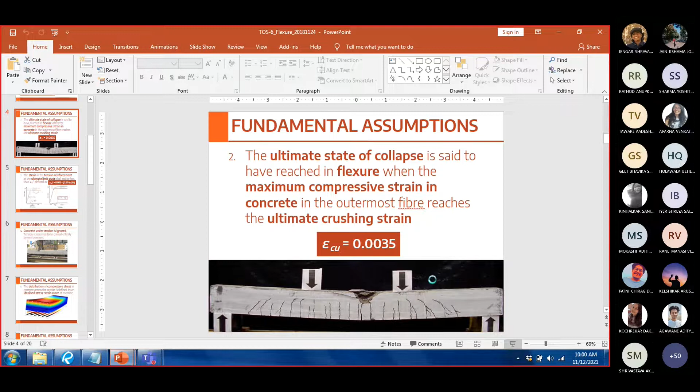Okay, so this is where we stop.

Concrete under tension is ignored because it is assumed that the tension is carried entirely by reinforcement, since the tensile strength of concrete is much lesser than its compressive strength. Also, the extent of cracking is not certain. In some locations, cracking might be up to a certain depth, in other locations up to a different depth, so we don't know how much concrete is already cracked. Therefore, we simply consider concrete only above the neutral axis. Whatever is below the neutral axis is just for holding the reinforcement in position, resisting shear and so on, but we do not consider its contribution in flexure.

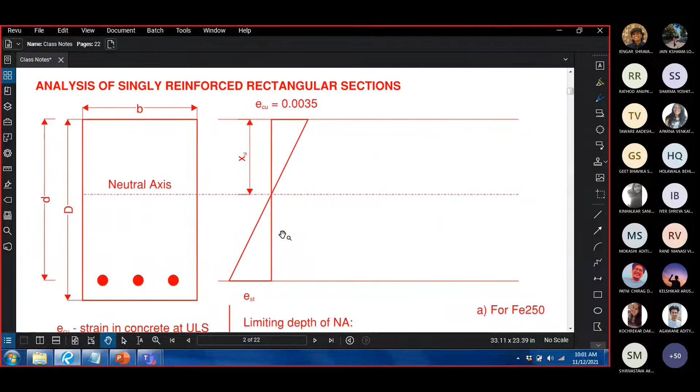The next assumption is that the distribution of compressive stress in concrete across the section is defined by the idealized stress strain curve of concrete. This might seem complicated, but it's easy. If this is my section, I know the strain variation. I'm already aware of the stress strain graph of concrete. So if I correlate this stress strain curve with the strain variation, the stress in concrete would be parabolic up to a certain point and then linear. As the strain increases, the stress increases parabolically up to a certain point, and then it is linear. That is what this assumption says.

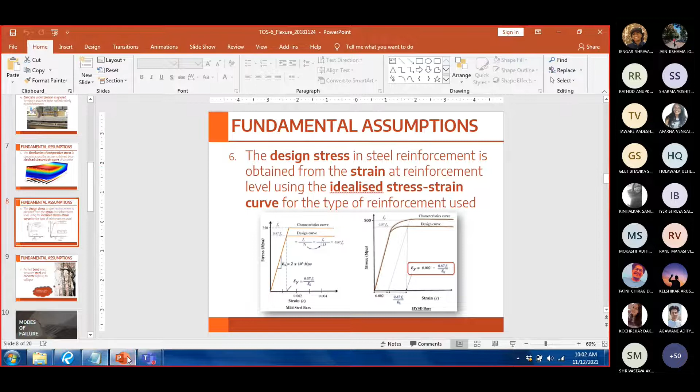The next assumption is that the design stress in steel reinforcement is obtained from its stress strain curve. If there's a certain value of strain, we get the corresponding stress value by considering the stress strain curve. This is our original curve, and the idealized curve looks something like this, or something like this. So if there's a certain value of strain, we can easily find the value of stress from this curve. That's what the assumption says.

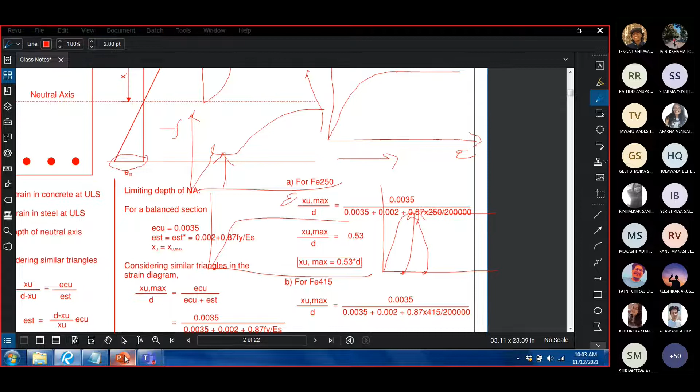The last assumption is that there's a perfect bond between steel and concrete. The reason for this assumption is that these are two different materials, and they can act as a single material only when there's a transfer of strain or stress from one material to the other. This happens only when there's a bond between them. We briefly discussed what bond is and its importance in transferring strain between steel and concrete. Just keep this assumption in mind: there has to be a good bond between the two materials so that they can transfer their strains to each other.

So these are all the fundamental assumptions we are going to make, and these are the same assumptions we made earlier while learning flexure for homogeneous materials. You might have learned this in theory of structures, or in structural mechanics, also called strength of materials.

Anyway, that was the easier part. Now, while learning any element, like we did in structural steel, the procedure was to first find out the various modes of failure, or the various ways in which the element can fail, and then look at ways of making sure we do not reach that kind of failure. We'll follow the same strategy here, where there are certain modes of failure, and we'll make sure these modes of failure do not occur, or if there is a failure, we want a certain kind of failure to happen. You'll understand this better by the end of the lecture.

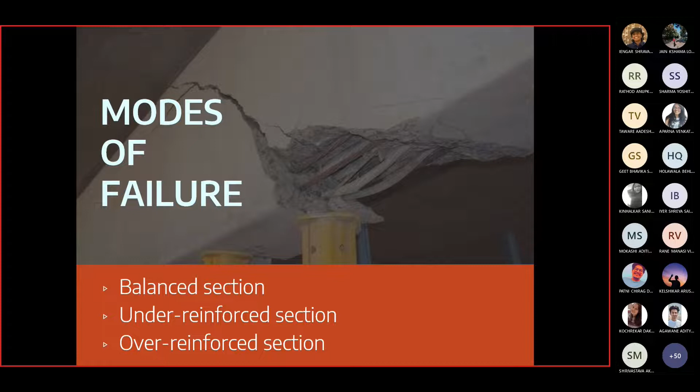So, a section in which the area of tension steel is such that at the ultimate limit state. What is the ultimate limit state? Ultimate limit state is a theoretical failure point. Beyond this, we consider the section to have failed. It is not functional anymore.

So a section in which the area of tension steel is such that at the ultimate limit state, the compressive strain in the extreme fiber of concrete reaches ultimate strain. Now what does that mean? This means at the ultimate limit state, the strain here is 0.0035.

So this is our balance neutral axis, or this is a neutral axis. This is concrete in compression, below this is tension. So at the ultimate limit state, the compressive strain in the extreme fiber, this is our extreme fiber of concrete, reaches the ultimate strain. So our ultimate strain is 0.0035.

And the tensile strain in steel reaches yield strain, this is termed as a balance section. So very simply, we are defining this in terms of strains. So at the ultimate limit state, if epsilon Cu is 0.0035 and epsilon Sy. I just want you to intuitively understand what these suffixes mean: Sy is steel and it's yielding, and epsilon Cu is ultimate. U stands for ultimate and C stands for concrete. So this value is 0.0035 and this value is

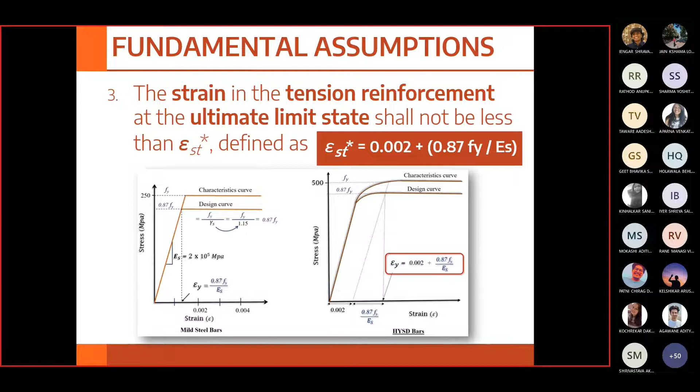Just try to draw this. So if this is our section, this is our strain variation. This is the neutral axis. The depth of neutral axis is denoted by XU, where X is the distance and U stands for ultimate. So the depth of neutral axis is denoted by XU.

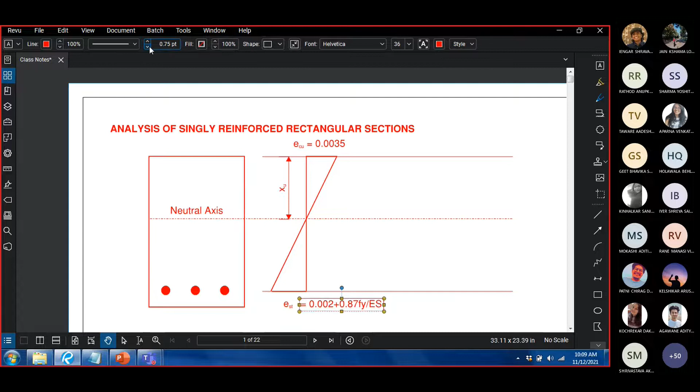So what this assumption says is that at the ultimate limit state, the strain here is 0.0035 and the strain here is 0.002 plus 0.87 Fy upon Es. So both these strain values occur at the same time. So we are reaching the maximum strain in concrete and the minimum strain in steel at the same time. Such a section is called a balance section. Any questions here?

So does this mean that the value of epsilon sy is equal to 0.0035? Could you please repeat - does this mean that the value of epsilon sy is equal to this 0.002 plus 0.87 Fy? No.

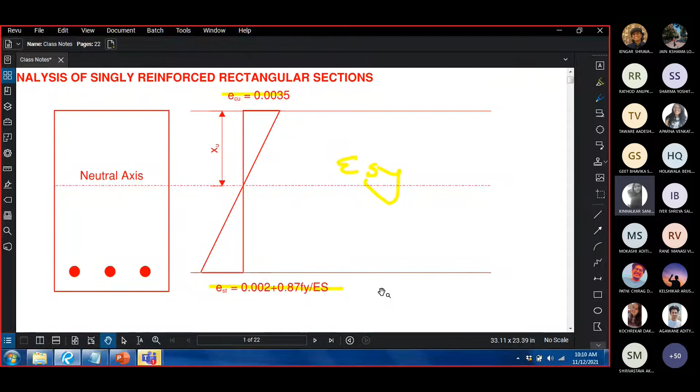Okay, so that might happen when your xu is exactly equal to d by 2. I sort of understood your question, and I appreciate you asking this. That will happen when this distance is equal to this distance. Only then are these triangles similar and this value will be equal to this value.

But in most cases, this is a very representative sketch. So in most cases, what happens is the depth of the neutral axis is something like this, so the strain variation is something like this. So this value, let us call it epsilon cu, and this value epsilon st. So epsilon cu is much less than epsilon st. Does that answer your question?

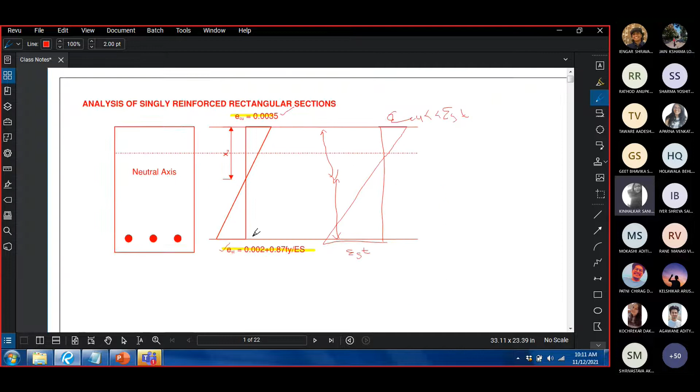Yeah. So in case of a homogeneous material, when let us say you have a steel block, in that case you would have your neutral axis exactly at the center. And in that case, let us call this epsilon compressive and this epsilon t. Your epsilon c would be equal to epsilon t if the material is homogeneous. But this is a heterogeneous material, your neutral axis might be anywhere - towards the top or towards the bottom, depending on the nature of the heterogeneity. Anyway, not getting into that.

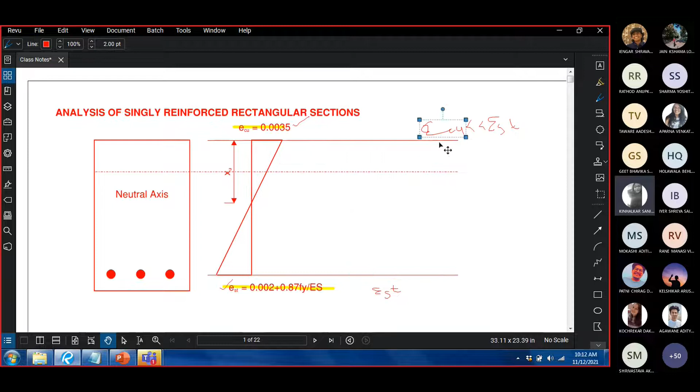If the maximum strain in concrete and the minimum strain in steel occur at the same time at failure, then such a section is called a balanced section.

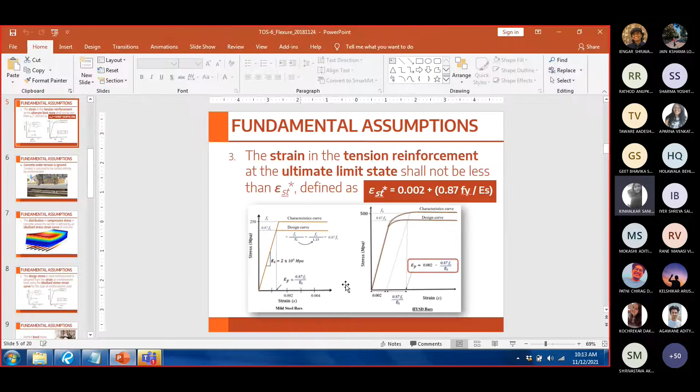Let us say the reinforcement placed in a balanced section is denoted by AST max. Now the question is, what will happen if you provide reinforcement lesser than AST max, and what will happen if you provide reinforcement greater than AST max?

If we provide reinforcement lesser than AST max, then the resultant section is called an under-reinforced section. Since we are providing reinforcement lesser than AST max, let us say there's a certain area, capital A, or A max, and now we are providing an area A.

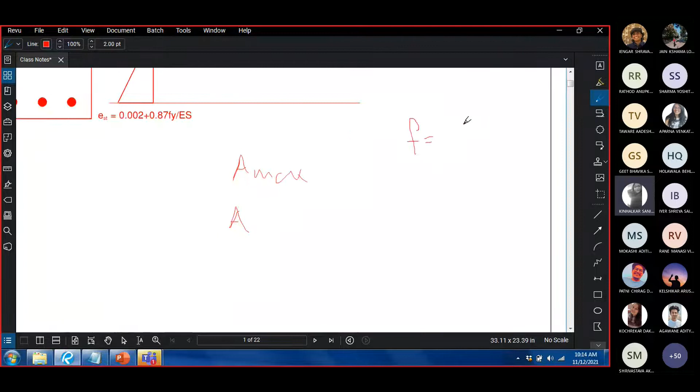What is stress? Stress is equal to force upon area. Let us say this is A max, the stress value is F1. Then F2 is equal to F upon A. Now, which of these stresses would be greater, F1 or F2? Since A is less than A max, F2 will be greater than F1.

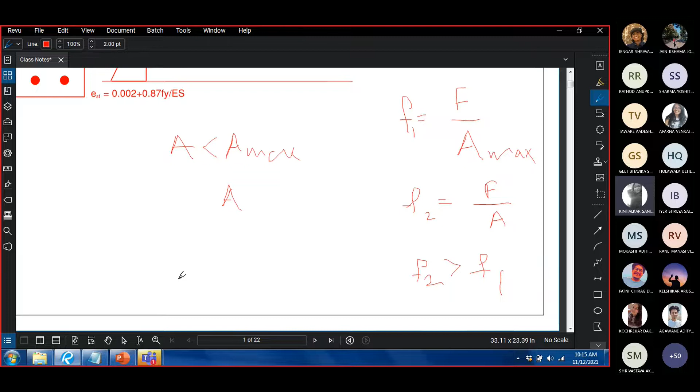So if we provide reinforcement lesser than AST max, what will happen is the steel will experience a larger amount of stress and the steel will yield first.

Let us try to put this in words. A section in which the area of tension steel is such that as the ultimate limit state is approached, the compressive strain in the extreme fiber of concrete is less than 0.0035, and the tensile strain in steel reaches the yield strain, is termed an under-reinforced section.

Now let us try to understand it with the help of a sketch. The reinforcement in a balanced section is denoted by AST max, and similarly, the depth of neutral axis is denoted by XU max. We'll understand why it is called max once we have understood these three types of sections. So this is XU max, the reinforcement is AST max, and the section is a balanced section.

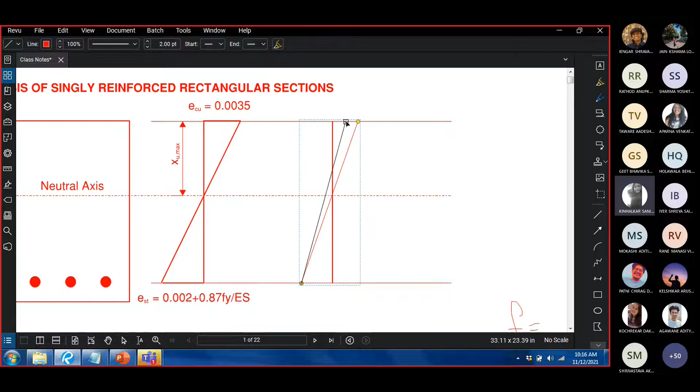AST stands for area of the reinforcement. Area of steel in tension. So 'S' is steel, 'T' is tension. Area of steel in tension.

So what we are saying for an under-reinforced section is, as the limit state of flexure is approached, the strain value here, that is epsilon st, has already reached the value 0.002 plus 0.87 Fy by Es.

But the strain in concrete is less than 0.0035. Since we provided area of steel lesser than AST max, this steel experiences higher stress, because the force is not going to change, right? The force is the same. So this steel would experience a larger amount of stress and strain, and this value will reach first.

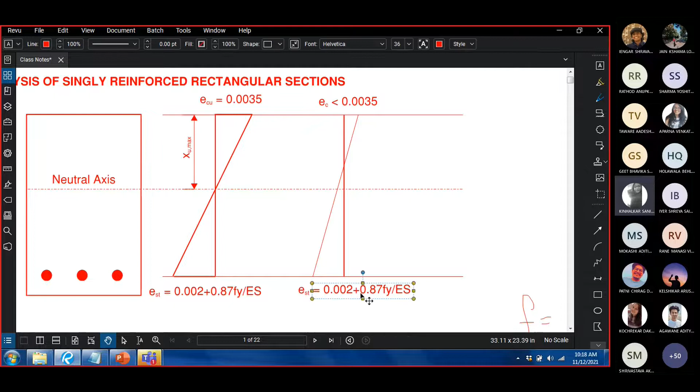So as the ultimate limit state is approached, this value is equal to 0.002 plus 0.87 Fy by Es, in order to save space.

The question is, has the section failed at this stage? No, because epsilon st is still at its lower limit.

I think steel can yield, okay. I think you're on the right track, but there could be a better answer.

So firstly, when do we say that a section has failed? When the strain in concrete reaches 0.0035, that is when we say the section has failed. This is just a lower limit. If this limit is reached, we do not say the section has failed. Only if the strain in concrete reaches 0.0035 do we say the section has failed.

So let us try to write down the series of events. The first event is epsilon st equals epsilon st star, but the section has not failed yet. So of course we can go on increasing the load and the resulting strain. This is our stage number 1 that you see in red.

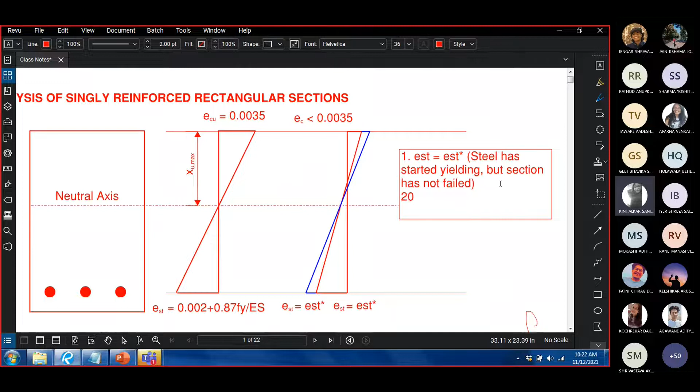So as we go on increasing the load, there will be a point when epsilon c will be equal to 0.0035. So this is our point where epsilon c has now reached 0.0035.

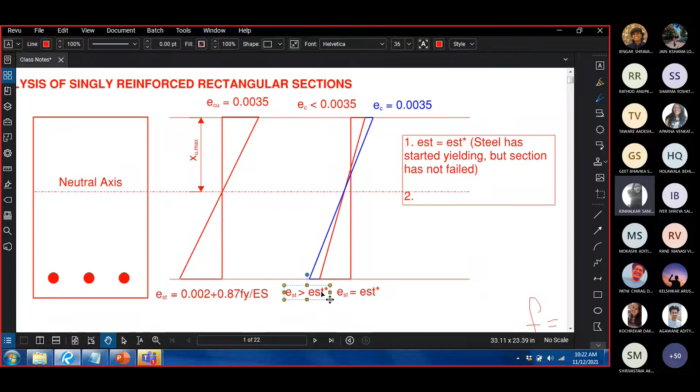Corresponding to this, the strain here is also going to increase, so epsilon st would be greater than epsilon st star. Now at this point, epsilon c, or the strain in concrete, is equal to epsilon cu, which is 0.0035, and epsilon st is greater than epsilon st star, and now the section has failed, or we have reached our ultimate limit state.

Now, if I compare the depth of my neutral axis with that of a balanced section, this is the depth of neutral axis of a balanced section. And if I look at the intersection of the blue line, I'll also make this blue. So this is the depth of neutral axis.

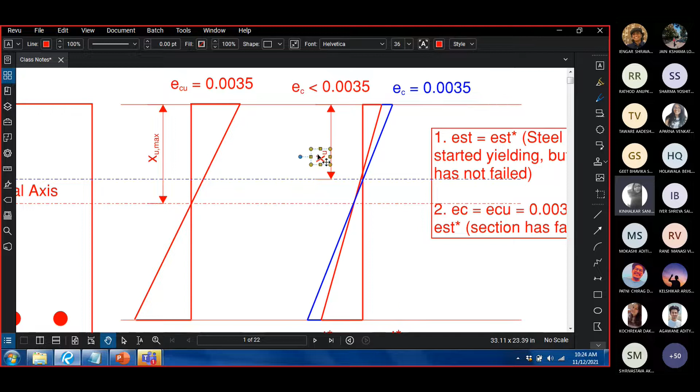Okay, so if I compare the depth of my neutral axis with the depth of neutral axis for a balanced section, what I observe is that the depth is lesser. So XU is lesser than XU max. The bottom line is I can say that whenever my depth of neutral axis is lesser than XU max, the section is an under reinforced section.

We'll get into the details of it, we'll understand why this is important, or how it simplifies things. But right now, just stay with what we are trying to learn, and we'll keep noting things. As we get into the analysis, we'll understand why this is important. But just note down all the observations here.

So here, AST provided is less than AST max. The depth of neutral axis XU is less than XU max. So that's how we recognize an under reinforced section.

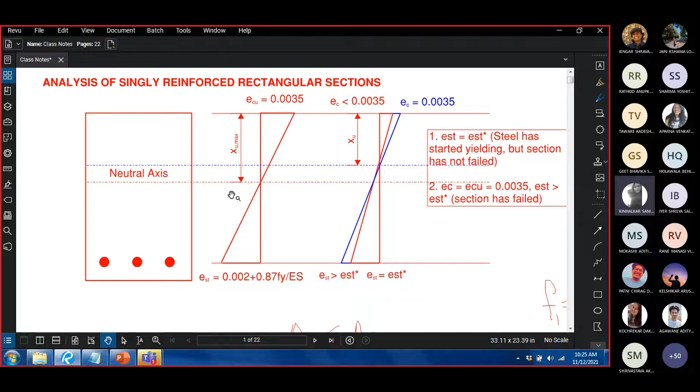Okay, are there any questions here? Is it too technical to understand? If it is, I just want you to honestly tell me so that we can learn it using very simplified examples. Is it too technical to understand? Can you explain it again, like the second sentence? Yes, I will explain it again.

So what we'll do is we'll first look at an over reinforced section also, and then we'll see if overall we understand these three types of sections, and then we'll solve some problems if we try to understand if there are still some gaps in some places. Okay, so this is about under reinforced section.

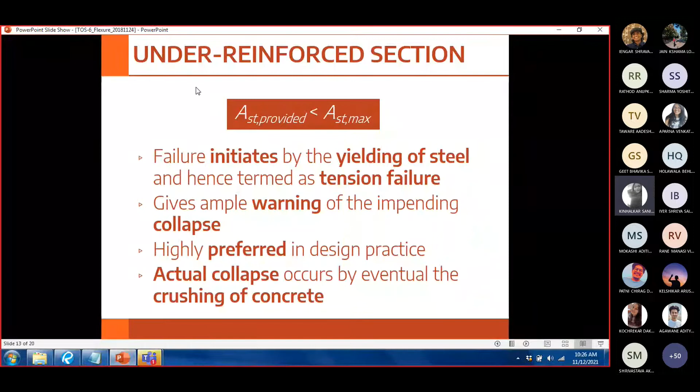Now let us try to understand an over reinforced section. So I'm skipping this slide for the moment because we just want to look at what is an over reinforced section first. A section in which the area of tension steel is such that at the ultimate limit state, the compressive strain in the extreme fiber of concrete reaches the ultimate strain, and the tensile strain in steel is less than the yield strain, is termed an over reinforced section.

So in this section, we are placing more reinforcement than AST max. Greater reinforcement, lesser stress, lesser strain. Therefore, the strain here is less than epsilon st star, but this strain has reached epsilon cu. Let us try to understand this with the help of a sketch.

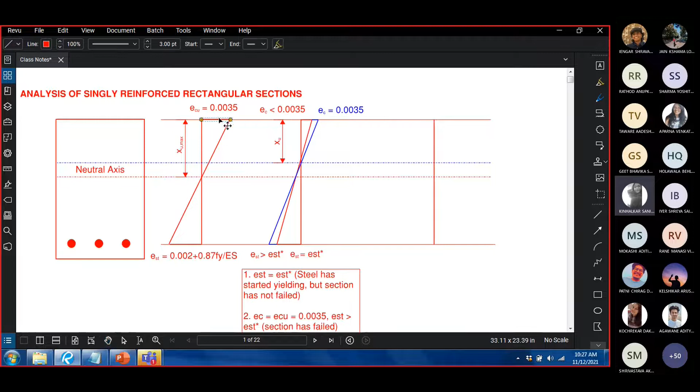So what we are saying here is at the ultimate limit state, this strain is equal to 0.0035, but this strain is lesser than epsilon st star. Now, if I join these two lines, let's reduce it further for ease of understanding.

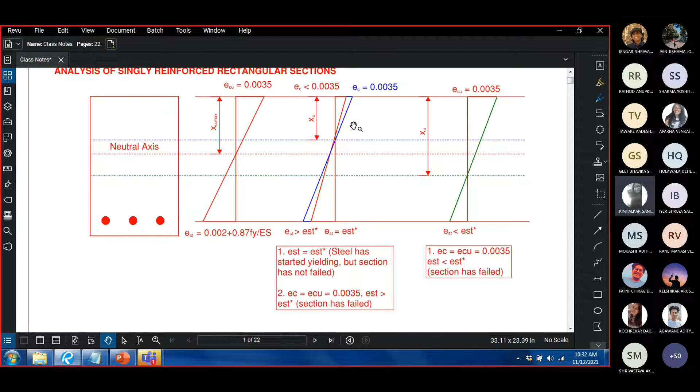Okay, so now I would just explain the under reinforced section once again to ensure that we are not leaving any gaps, because everything that we learn here onwards is based on these fundamentals. So I just want you to pay attention and try to understand it one more time. If there are still any gaps, we'll work on it again.

In an under reinforced section, as we are moving towards the ultimate limit state, or as we are moving towards failure, what happens is the strain in steel reaches the value of epsilon ST star. But at the same time, the strain in concrete is less than 0.0035. So we have two limits, limit 1 on concrete, limit 2 on steel.

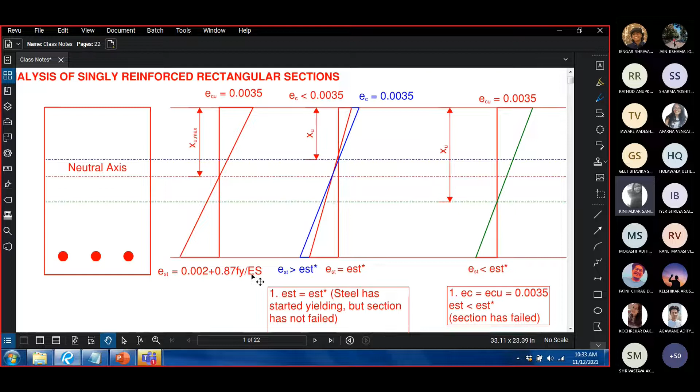So the lower limit of steel is already hit, okay, but the upper limit of concrete is not yet hit. Our failure criteria is very clear: when this value reaches 0.0035, the beam has failed. Very clear criteria. So at point 1, the beam has not failed yet, which means that we can increase our loading on that beam. When we load it further, the strains are going to increase.

The strain which was here, then we'll have a strain value here, then here, then here. At point number 2, what happens is now the strain in concrete hits 0.0035. Similarly, the strain in steel is also going to increase because steel has now yielded. So at point 2, we reach a value of epsilon ST that is greater than epsilon ST star. Now, what is that value?

We don't care, because all we cared about was this value. We don't care about what this value is. So at point 2, our epsilon C is equal to epsilon CU, which is equal to 0.0035, and our epsilon ST is greater than epsilon ST star, and the section has failed in a ductile manner. I would just add here that the section has failed.

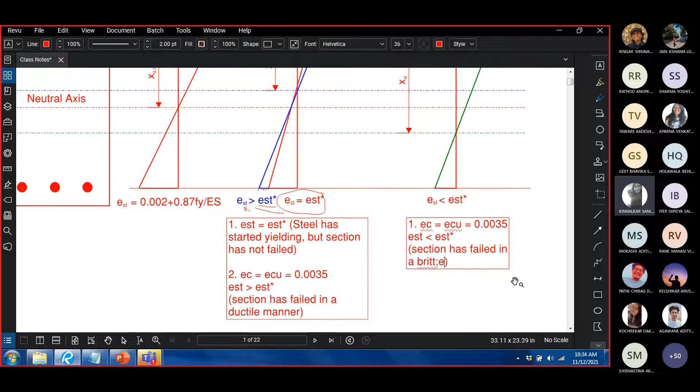So this is the difference between a balanced section, an under reinforced section, and an over reinforced section. Questions?

Bhargav: So then when you're designing a beam, in many ways, like you're looking at an under reinforced section, but then to design the beam so that it would work, the neutral axis of that beam should be between the neutral axis of the balanced section and the under reinforced section, right? Okay. So I sort of understand what you're trying to ask. Okay, let me see if I can answer this.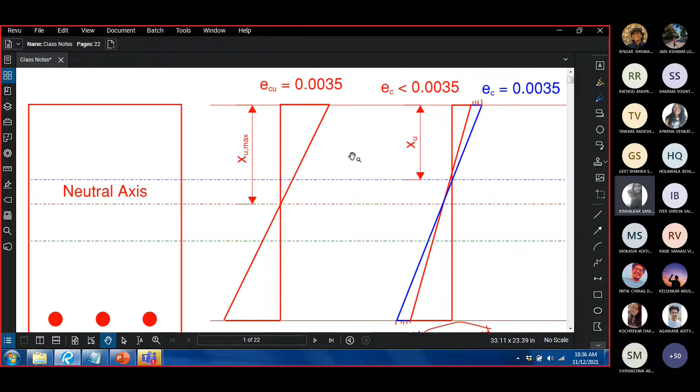So if the neutral axis here is here, it is an under reinforced section. If the neutral axis is here, it's an under reinforced section. Or if the neutral axis is here, it is still an under reinforced section. Okay, so AST max is a singular number, but anything lesser than AST max is not a singular number. So any section that has reinforcement lesser than AST max is an under reinforced section. So our only benchmark is AST max or XU max. Anything less than that is an under reinforced section.

So this number is not fixed. I think what your question was is, so just to make sure that the beam would work, our neutral axis should be somewhere in between. No, it does not mean that. What it means is your neutral axis should be anything less than XU max. Okay, this XU is not fixed. XU max is fixed, XU is not fixed. So we are targeting anything that is less than XU max, anything in this zone. Okay.

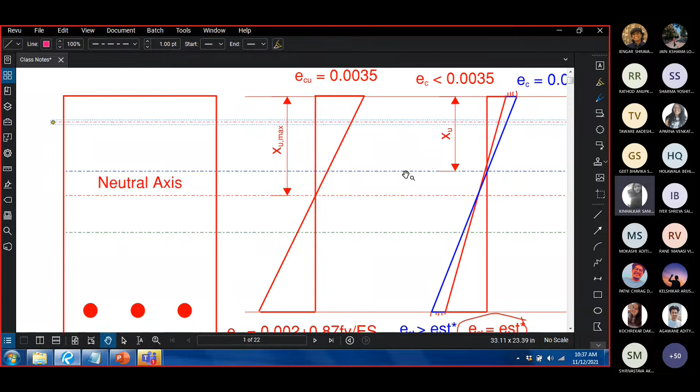Now I would go back to a couple of slides that I skipped. In an under-reinforced section, the area of steel provided is less than AST max. Failure initiates by yielding of steel, and hence it is termed as tension failure. This kind of failure gives ample warning of impending collapse, which is highly preferred in design practice because we do not want any failure to be sudden. Every failure, if at all it occurs, has to be ductile. Though the failure initiates by yielding of steel, the actual collapse occurs by eventual crushing of concrete. So in an under-reinforced section, we cannot say it's a failure because of steel. The ultimate failure occurs by crushing of concrete, because that's the failure criteria.

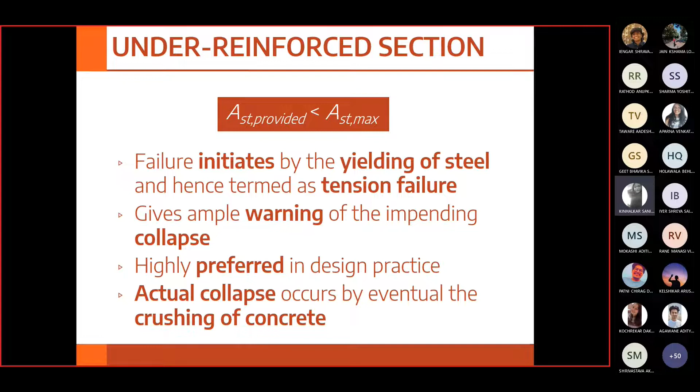Let us just try to see experimentally what happens in an under-reinforced section. Perhaps this would make our concepts clearer.

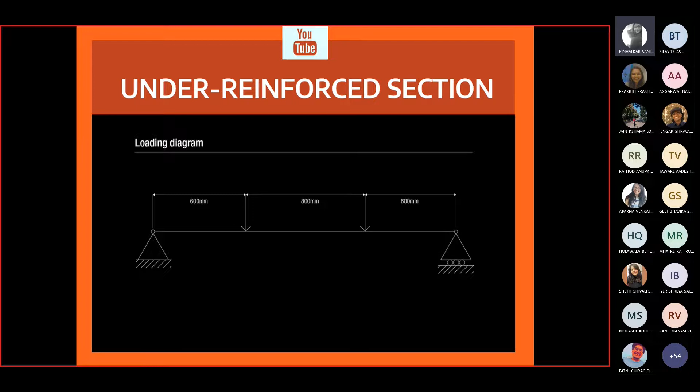The testing rig is now starting to apply vertical loads to the specimen, and we can see that it is deflecting and starting to crack. This means that the steel in the beam is taking up the tension that is developing in the lower half of the section.

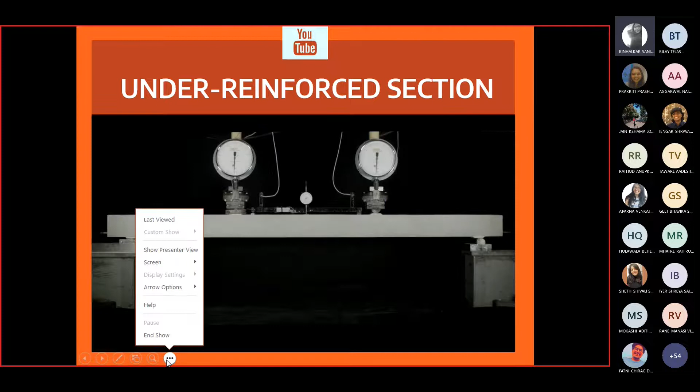This video shows an under-reinforced concrete beam being tested in bending. The specimen is made from concrete containing regular Portland cement. The rebar is regular reinforcing steel. Just give me a moment, I just want us to focus on a particular point.

In the lower half, we can see the cracks opening up as the steel takes the tension. So this is our state number 1, wherein the strain in steel has reached epsilon st star, but the strain in concrete is still less than 0.0035. And therefore we start seeing cracks here, which is indicative of the steel having started yielding now, because of which we are seeing these cracks. So we have reached state number 1.

The steel starts to yield, which allows the beam to deflect greatly. There's so much deflection in the beam, it's visible, but still the concrete is not crushed, or the strain in concrete is still less than 0.0035. Eventually the beam fails. Now this is our state number 2, wherein the strain here has reached 0.0035, and the strain here is greater than epsilon st star. This is our under-reinforced section.

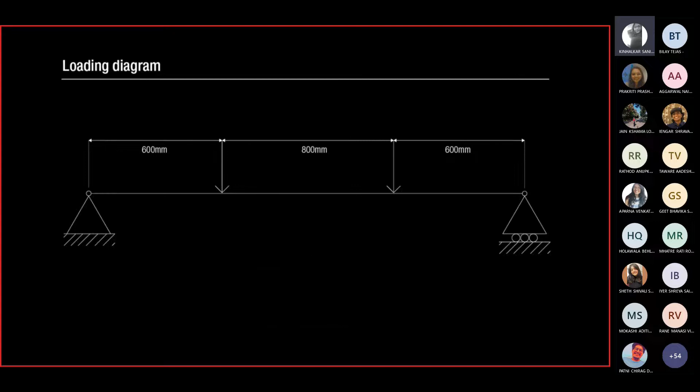This video shows an over-reinforced concrete beam being tested in bending. The specimen is made from concrete containing regular Portland cement. The rebar is regular reinforcing steel. The loading diagram shows the beam being subject to 4-point bending.

The testing rig is now starting to apply vertical loads to the specimen. We can see the beam displacing and cracks opening up on the tension side of the beam as expected. Then all of a sudden, the concrete in the top surface of the beam fails explosively.

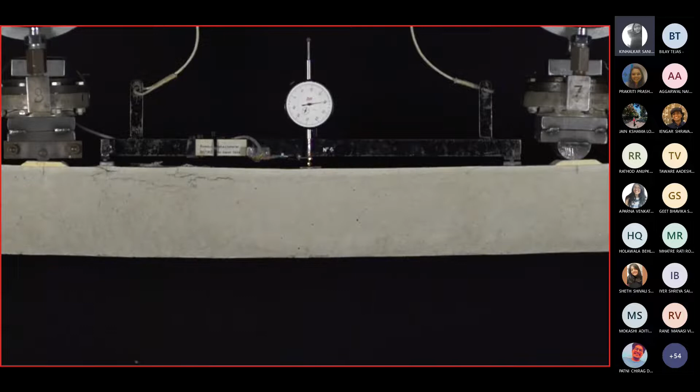Let's slow down the footage and look at the top surface. Remember that the top side of the beam is under compression. Because we have heavily reinforced the lower part of the beam, which allows a large amount of tension to be carried, the same large amount of compression needs to be carried by the concrete near the top. This causes the concrete to crush before the steel has a chance to yield. For a structural engineer, that's a bad way for a beam to fail, because concrete crushing is brittle, it's sudden, and you don't get the gradual failure that you'd obtain in an under-reinforced beam.

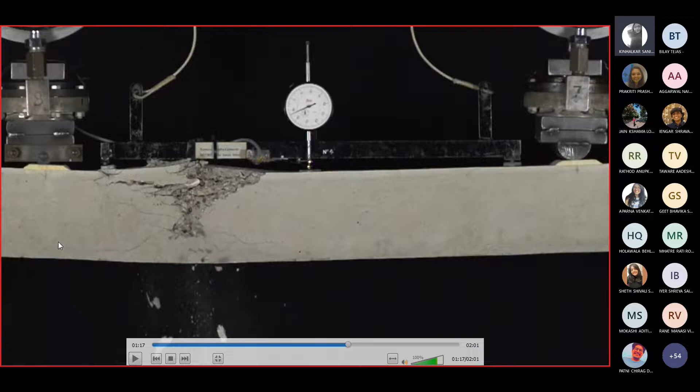The beam is under compression before the steel has a chance to yield. So I want us to focus here: we don't have stage 1 and stage 2, we directly have an end stage. The steel is not yielded yet, and the maximum strain in concrete has reached 0.0035, meaning the concrete has crushed but the steel has not yielded. Because of this, we don't see nicely distributed cracks, we don't see a lot of deflection, and there's a sudden or explosive failure.

Such a kind of failure is not desired. This failure is sudden, caused by crushing of concrete, and hence it is termed a compression failure. This gives almost no warning before collapse, and it is not preferred in design practice. So this is the difference between a balanced, an under-reinforced, and an over-reinforced section.

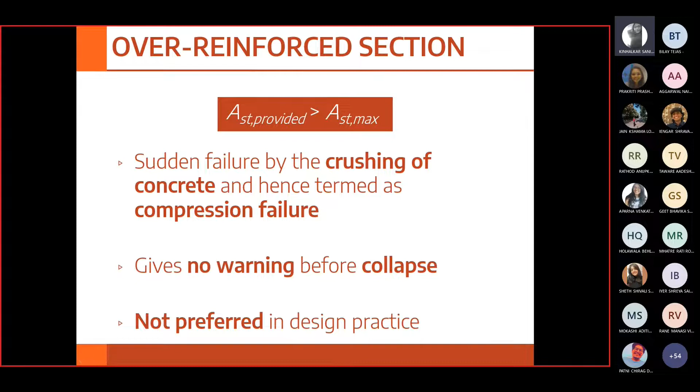Questions? I have a question. Is there any lower limit for under-reinforced sections? Because if it's just under-reinforced... Lower limit of what? If the neutral axis was too high on this graph, wouldn't it fail immediately with the slightest load? Wouldn't it start deforming with the slightest load?

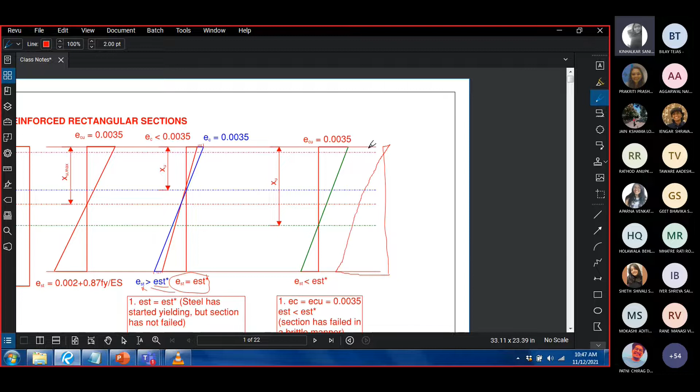That is correct, but okay, I sort of understand what you're trying to say. I think what she's asking is whether there's a lower limit for XU max, for XU. For example, if the failure is occurring for... just give me a moment. Let me know if I read your question correctly: is there any lower limit for XU? Because if XU is much smaller, this could mean we'll have a failure strain distribution something like this. Yes, that's what I was asking.

Okay, so our objective is that whatever the depth of the section, it has to be optimal, meaning we are sort of aspiring for a balanced section. We are aspiring for this situation, but we don't reach here - this is our maximum limit. So what we're trying to do is get as close to XU max as possible, but not reach XU max, because after that we're just at the edge.

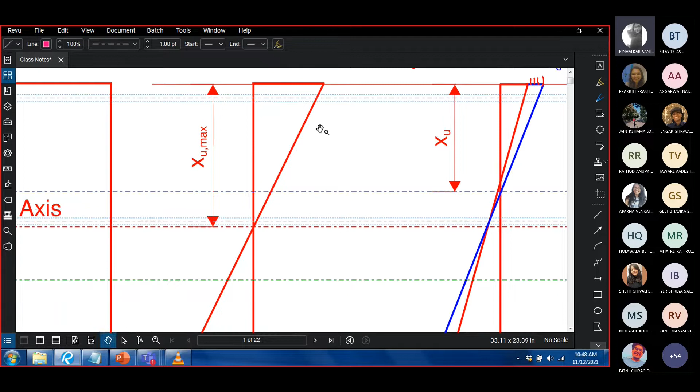So there's no lower limit. If your depth of neutral axis looks something like this, it means you've given a very deep section, which is not even required. In design practice you will not see examples like this, because it would mean you've given a much deeper beam than required. So XU max is an optimal case, and we try to be as close as possible to the optimal design - we totally avoid being in this region, and target being as close to XU max as possible.

Therefore there is no limit, no lower limit to XU. You can design a section in such a way that it gives a very low value of XU. It's not a design limit, but that would not make any sense design-wise.

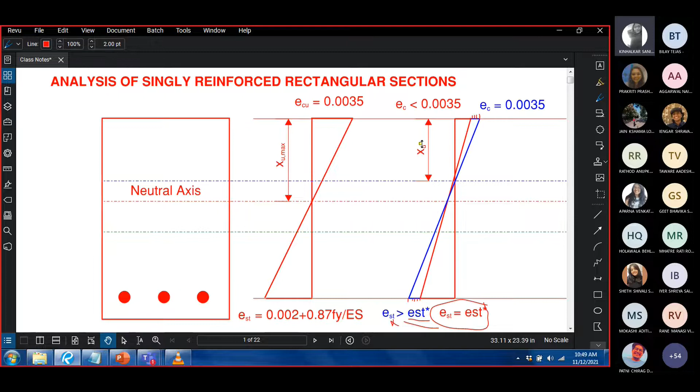Thank you. Any more questions? Have everyone understood everything?

Okay, just to get a consensus, how much percentage of this have you understood? 10%, 15%, 95%, anything - if you don't give me feedback, there's no way for me to know whether you've understood or not, whether I should go ahead. After revising, it will be around 80, 90.

It's okay, just personally I'm feeling a bit out of it, so I think I'll have to watch the lecture over and over again, at least once more, because I'm a bit sleep deprived right now actually. Okay, what about others? Yeah, I think 90. Yeah, it's understood, and maybe with revision we can get it fully.

Okay, some people have not spoken yet. How much have you understood? Need to go through the lecture once again to get it fully.

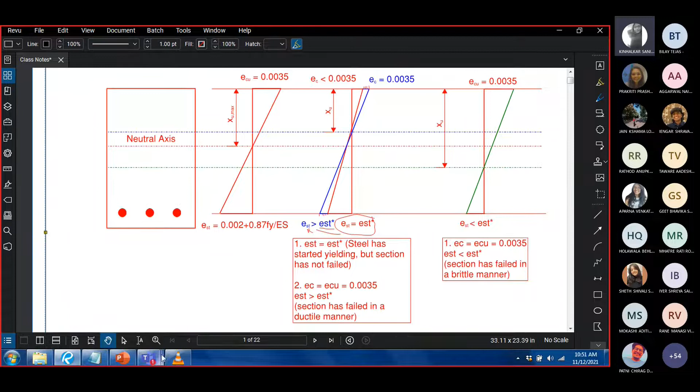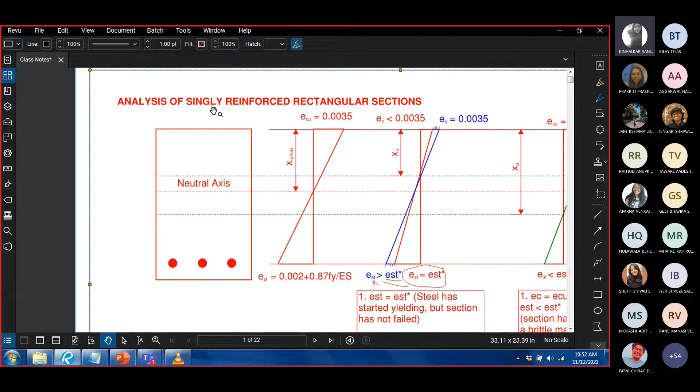So this was the basic theory behind analyzing or designing flexural members. But this is just theory now - we still do not have any equations, we have not looked at any numbers. This is okay, but how to size a beam, how to provide reinforcement in a beam, this is not something we've learned yet. So this we'll learn in the next part of this chapter, which is the actual analysis of singly reinforced rectangular sections. Now we are going to analyze a beam - we are limiting our scope to analysis of beams, not the design of beams.

We are not going to get into the design of singly reinforced rectangular sections. We are going to look at the analysis, and I'll give you thumb rules for sizing beams. So you'll understand that if your span is such, and your end conditions are such, you can use a thumb rule. For example, L by 15 for a particular condition, or L by 20 for another, and that would help you size those beams.

That's very basic, but in terms of placing reinforcement, we are going to get into the analysis, not the design. So the question is, what is the difference between analysis and design? In analysis, you have all the information about the section: width, depth, reinforcement provided, grades of steel and concrete, and the loading. You just have to find out if the section is adequate or not. That is called analysis.

In design, you have only the loading. You don't have anything else. If it's a theoretical exam question, you'll also have the grade of concrete and grade of steel, but then you have to decide what should be the width of the beam, the depth of the beam, and the reinforcement quantity.

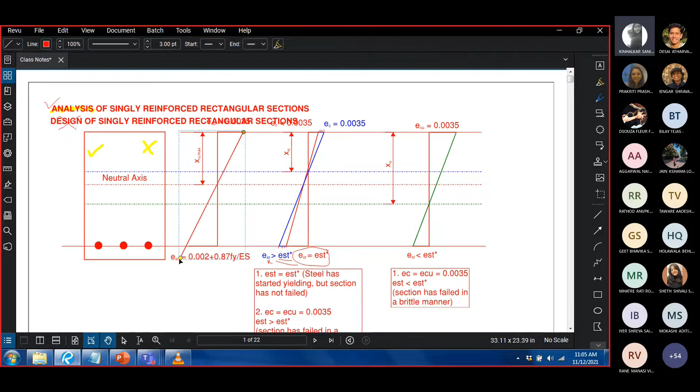So we have been drawing all our strain diagrams only up to the centroid of the reinforcement. We are not drawing our diagrams up to the lower soffit of the beam. Can someone answer why? Because the load in tension is mainly taken by the reinforcement, not the concrete mass, since we are ignoring the concrete in tension. Therefore, it doesn't help us in any way by drawing this diagram up to there. Though it is valid till there, we are interested only up to this point. We've basically assumed it to be zero, negligible. If I say this is the neutral axis, we are just assuming that there is no concrete in this zone.

So that's the reason why we are interested in the effective depth. We are not interested in the total depth. We are interested in the distance between the centroid of the reinforcement to the compression face. So capital small d is more important to us than capital D.

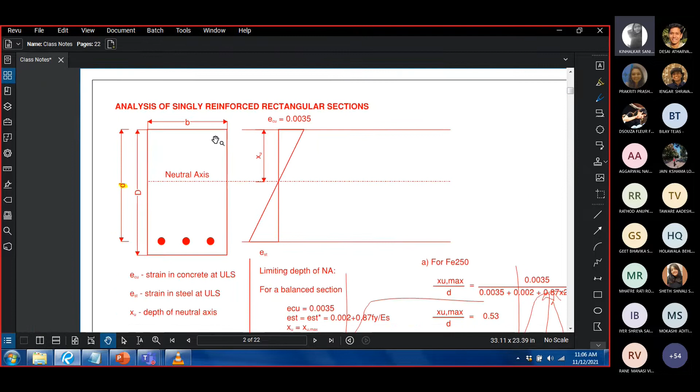Okay, I just want you to draw this sketch and leave out some space on the right side here. We are going to add more diagrams here. So just draw this sketch.

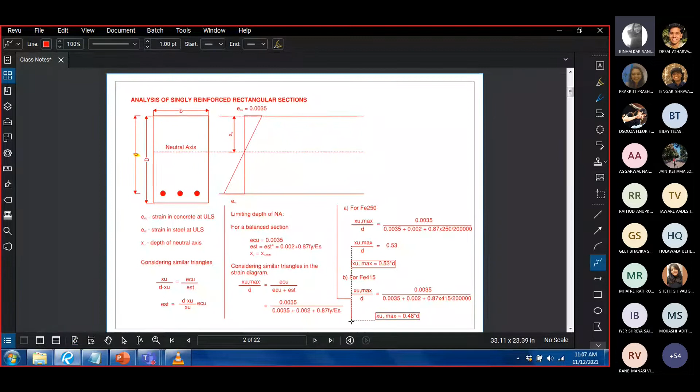So now let us try to describe what we see here. Epsilon st is the strain, and epsilon cu is the strain in concrete at ultimate limit state. This is a theoretical failure state. Epsilon st is the strain in steel at ultimate limit state, and xu is the depth of neutral axis.

Okay, I'm just assuming that you're noting this down simultaneously. If you think that's too fast, let me know, we'll slow down a little bit. Can you slow down a little bit? Yes. Or what we could do is go through the explanation first, and then you could write it down later. So towards the end, I'll give you some time to write this down. But it's very important that you write this down, because then you actually get a feel of the process of developing these equations. So I strongly suggest that you write this down.

So once you understand, we just copy what's on the slide once you've understood it. Okay, so this is the strain in steel, this is the strain in concrete, this is the depth of neutral axis.

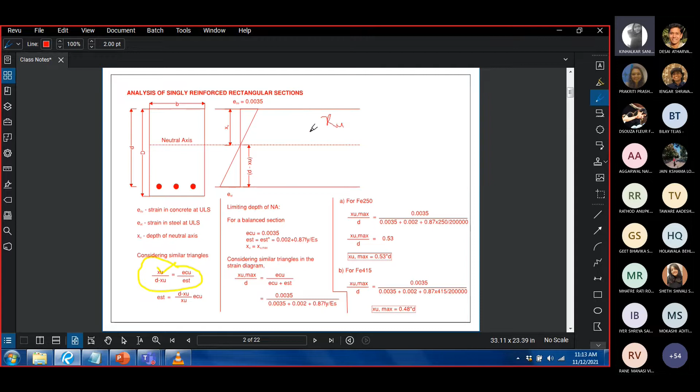Okay, so what we'll do is write our original equation. Just give me a moment, we are not writing anything right now. So xu upon d minus xu is equal to epsilon cu upon epsilon st. This is our original equation. If I rearrange this, xu into epsilon st is equal to d into epsilon cu minus xu into epsilon cu. So if I rearrange this again, xu would be equal to d times epsilon cu upon epsilon st plus epsilon cu.

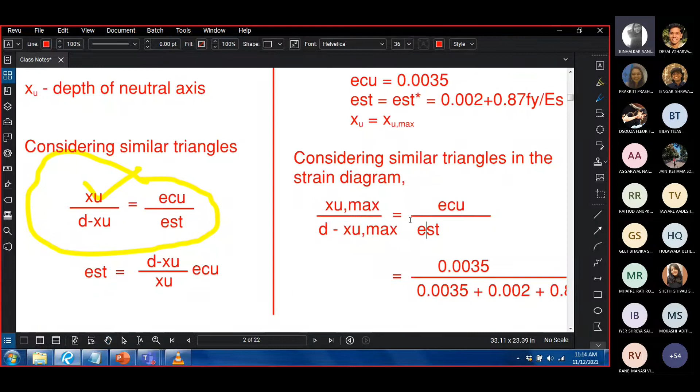So we'll start, at least you have understood the equation on the left, right? This equation, okay. So I'll just start with that equation. Xu upon D minus Xu max, write it this way, is equal to epsilon Cu upon epsilon. It's a basic equation.

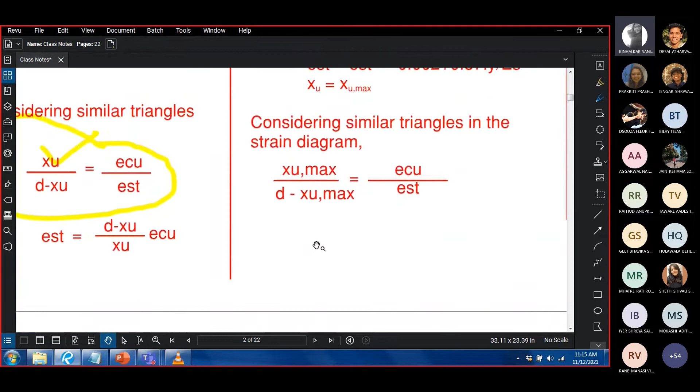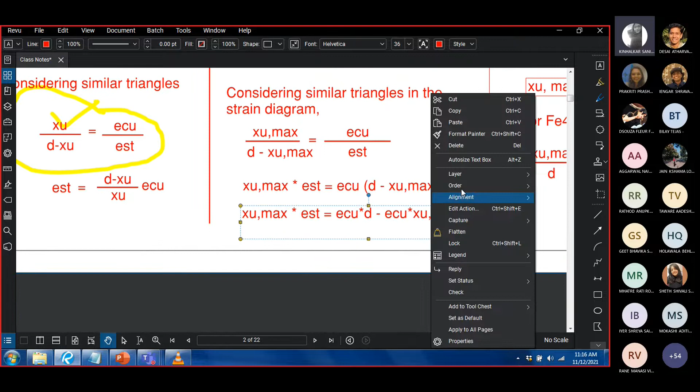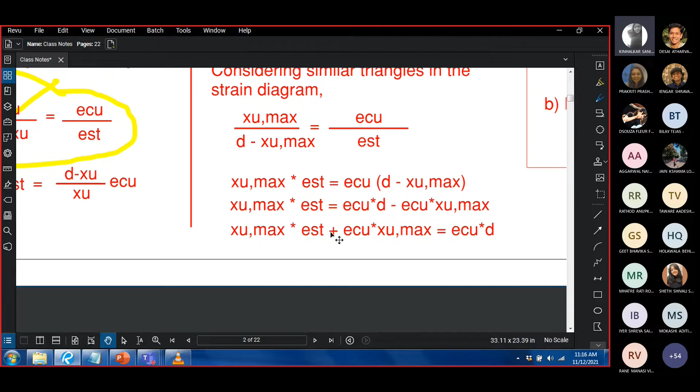Now we'll just have to rearrange this. So Xu max into epsilon St, this is equal to epsilon Cu into D minus Xu max. So if I again rearrange this, what I'll get is Cu into Xu max. Just multiplied epsilon Cu inside to both the equations. If I rearrange this further, what I'll get is... so what I did is I just shifted this term from RHS to LHS. So Xu max epsilon St, then shifted this term on the right. I'll take Xu max as common and rearrange this.

Xu max. So this Xu max is equal to this upon... So I just took out Xu max common here, and then we get epsilon St plus epsilon Cu, which goes to the denominator, and this is epsilon Cu into D. So this is the final equation that we get, which we could have got even considering similar triangles, but just for ease of explanation. So Xu max is equal to epsilon Cu D upon epsilon St plus epsilon Cu. It's not something you have to remember. We're just getting to something that is important to us using this process.

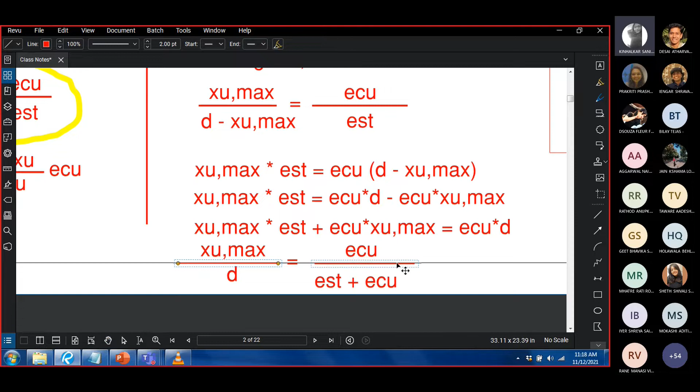So finally, if I have to rewrite this, just give me a moment. If I just have to write this in terms of D, all the distance terms on the left hand side, all the strain terms on the right hand side. I can also write it like this. So this is the equation that I had started this derivation with: Xu max upon D is equal to epsilon Cu upon epsilon St plus epsilon Cu.

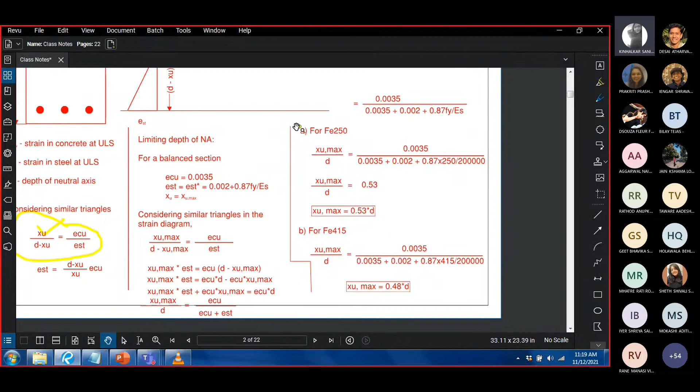So I hope you know what are the commonly used grades of reinforcing steel. So the most commonly used is Fe 500. The ones that were used in the past are Fe 250, then Fe 415, then we have Fe 500 and Fe 550. We'll look at them, okay? So if I say Fe 250, meaning that Fy value is 250 megapascal. So I can rewrite this equation as Xu max upon D is equal to 0.0035 plus this entire thing with Fy as 250 megapascal and Es as 2 into 10 power 5 megapascals. If I solve this equation, I get a value of 0.53.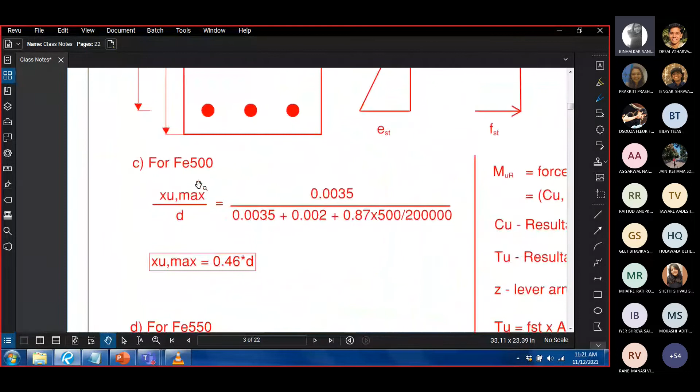So for Fe 250, Xu max is 0.53 times D. If I substitute the value of Fy as 415 megapascals, so I just substitute 415 here, I get a value of Xu max is equal to 0.48 times D. Now, if I substitute the value for Fe 500, which is 500 megapascal, I get a value of 0.46 times D. And if I substitute a value for 550 megapascal, just substitute 550 here, I get a value of Xu max is equal to 0.44 times of D.

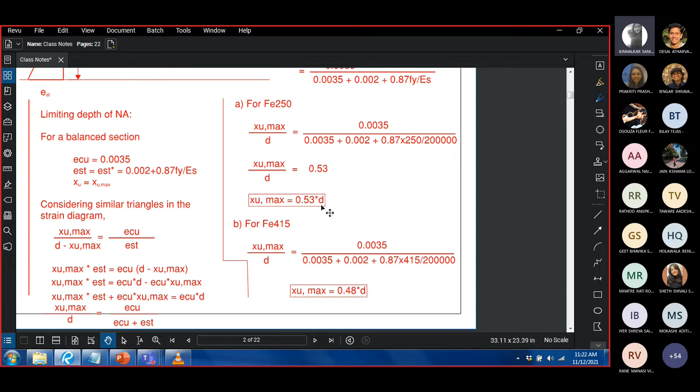Now, why am I throwing all these numbers at you? What I want to highlight is that irrespective of the grade of concrete, the width of the concrete section, or the amount of reinforcement you have put in, irrespective of all that, your Xu max depends only on the effective depth of the section and nothing else, and the grade of steel. So for Fe 250, irrespective of the amount of steel you put in, Xu max is only a function of its depth. For Fe 415, Xu max is always equal to 0.48 D. For Fe 500, Xu max is always equal to 0.46 D. For Fe 550, Xu max is always equal to 0.44 D. How does that help us?

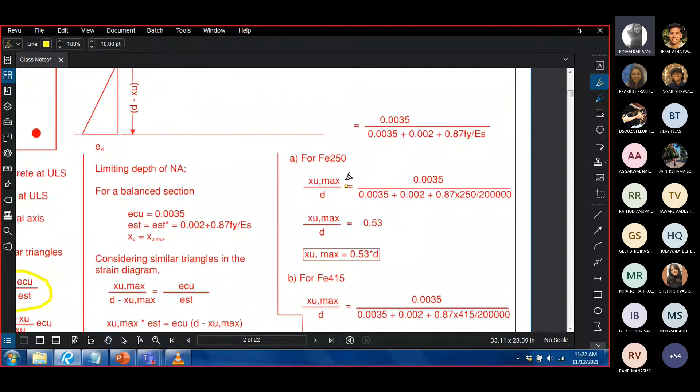That helps us in deciding if a section is under reinforced or over reinforced, because we have seen that if XU is less than XU max, the section is under reinforced. Now, how can we get the value of XU max? For that we don't need anything. The only thing we need is the grade of steel and the depth of the section. Using this, we can obtain the value of XU max, and then compare it with our XU to say if a section is under reinforced or over reinforced.

So what we are trying to do here is just calculate the value of XU max. XU max is our benchmark. Referring to this benchmark, we can define our section as under reinforced or over reinforced. And what we've just learned is that it's very easy to find out this value. It depends on only two things: the grade of steel, and the depth of the section, particularly the effective depth of the section. It is a function of only these two things.

So if we know this, we can easily find out what is the value of XU max. Once we have this, we can compare our XU with XU max and say if a section is under reinforced, over reinforced or balanced. That's the objective. Any questions here?

Have you guys understood everything? There must be some questions. I think when we look at the class again, then we might have some questions, but right now it's clear. Okay, if it's clear, then well and good.

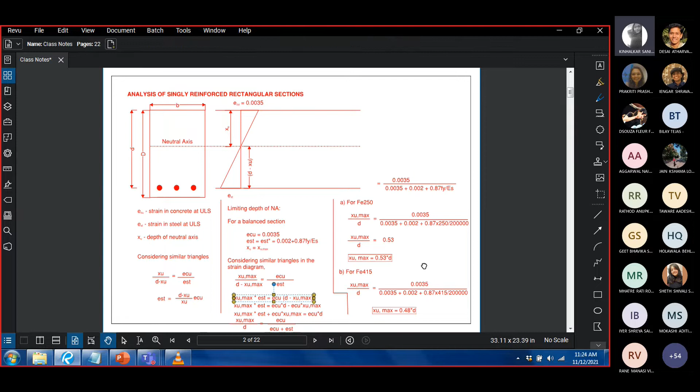If once, okay, how do I put it? It's very simple. So let us say two similar triangles, side 1 upon side 2 is equal to, so what I can call it, okay, rather than this. Similar triangles here. Let us say this triangle is A, this triangle is B, and this side is 1, this side is 2. So naturally this side is 1 and this side is 2. So A1 upon B1 is equal to A2 upon B2. I hope everybody understands this.

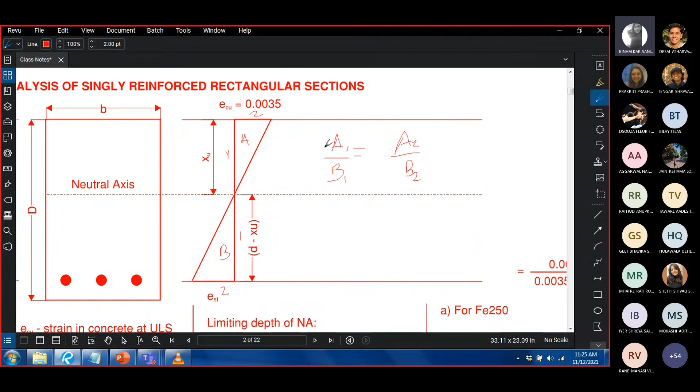So I can also write this as, this is clear now, I'm calling this side A1. So this is triangle A's first side. So this side is A1. So A1 upon B1 is equal to A2 upon B2. Okay, this is junior KG stuff. So I've just written this as A1 upon A1 plus B1.

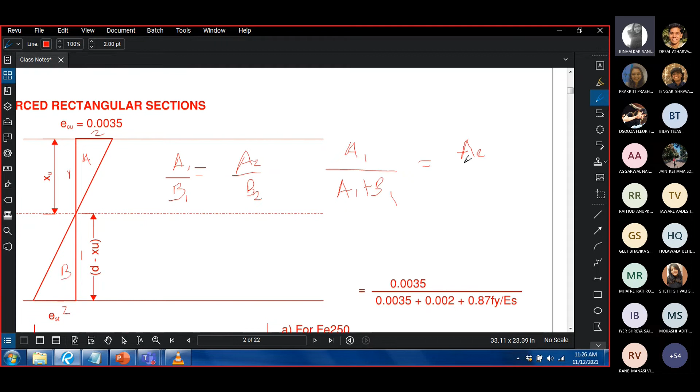And let's simplify this a bit further. Just a moment. So I can also write this as A1 upon A1 plus B1 is equal to A2 upon A2 plus B2. This is all I've written here.

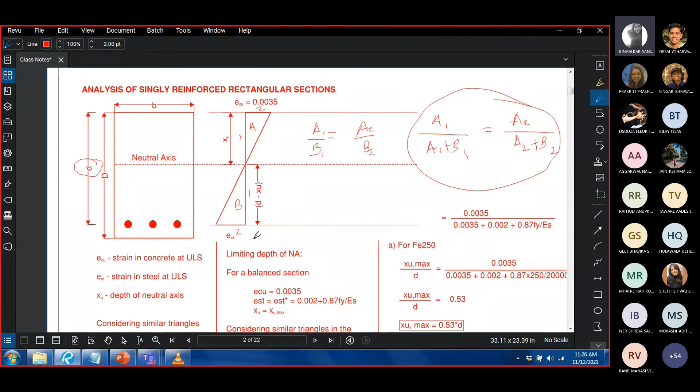So my A1 is XU max. XU max upon the effective depth d, which is A1 plus B1, this is D, is equal to A2, which is epsilon CU, upon A2 plus B2, so 0.0035 plus epsilon ST star. If this is very confusing to you, let it go, and go directly to this equation.

See, I'm asking you to skip this because it is not the intent of this discussion, this is just a mathematical procedure. I don't want you to blindly accept that XU max is equal to 0.53D without telling you how I've come to this number. That's the only intent. Okay, I think we already exceeded our time.

So I just want you to give some time to go through these equations that we have seen today, and ask me a lot of questions in the next lecture, to ensure that we are on the same page before we go ahead. So if you want to write all this down, please go ahead. I'll keep sharing the screen, whenever you want to go to the next page, let me know.

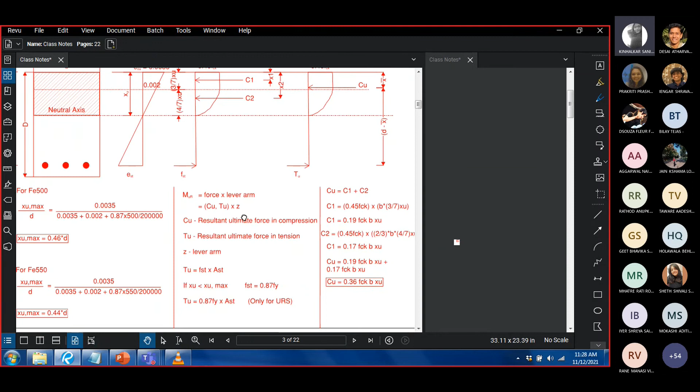Or what I could do is, so both the pages are in place. Please write this down. Give it some time, go through the lecture if required, but definitely go through the notes.